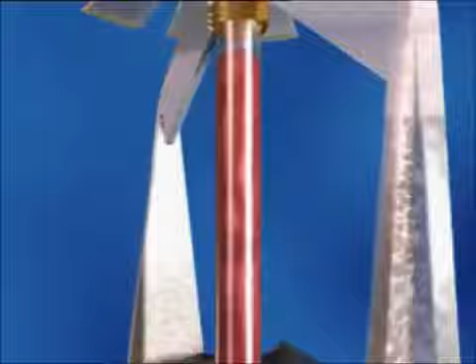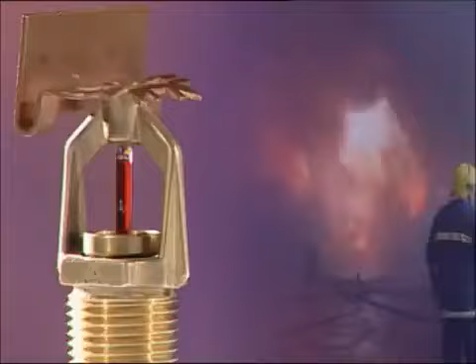Fire sprinkler systems were invented over 120 years ago. Since then, several hundred million sprinkler heads have been installed throughout the world. In that time, they've effectively protected thousands of buildings, helped prevent the financial collapse of numerous businesses, saved countless lives, prevented innumerable burn injuries, and protected the environment from catastrophic fire-related pollution. They're universally acknowledged as the most effective first line of attack against fire.

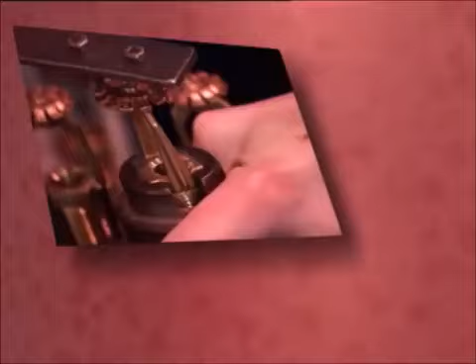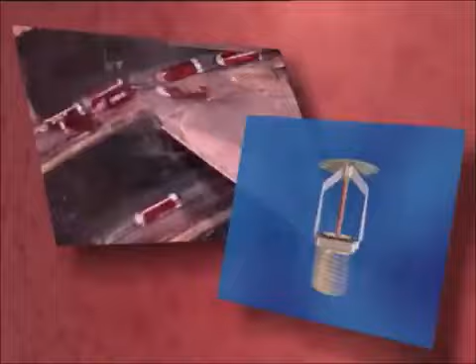The world's first rules for the design and installation of automatic fire sprinklers were written in the UK by John Wormald in 1885. Fire sprinkler systems in the UK are generally designed in accordance with British Standard 5306 Part 2, and in some instances, Loss Prevention Council (LPC) rules for automatic sprinklers. American rules may sometimes be used, being Factory Mutual or National Fire Protection Association.

Sprinklers are designed to cope with the fire risk presented by each individual building and may also be specifically configured to save lives.

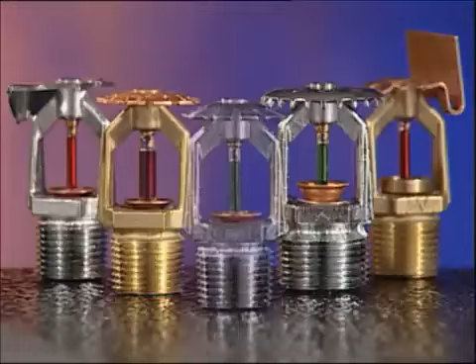Water still remains the most effective firefighting medium available. Sprinklers will deliver water right into the heart of a fire during its early stages through a specially designed sprinkler head.

Sprinkler heads are unique. They automatically detect a fire, discharge water right into the seat of the blaze, and operate a local alarm. They can also operate a remote alarm to alert the fire brigade or other emergency centre.

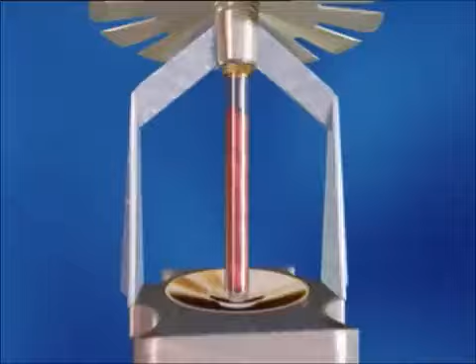A typical sprinkler head comprises a threaded body to connect to pipework, with a valve seal to hold back the water. The valve seal is retained by a glass bulb which contains a liquid that has a high coefficient of expansion. A small measured quantity of vapor remains trapped when the bulb is hermetically sealed.

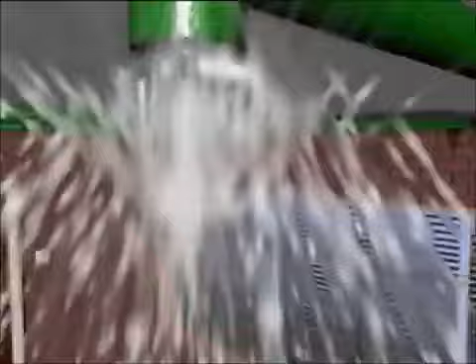When the liquid expands under the influence of heat from a fire, pressure in the bulb rises until the vapor is compressed. Further increases in temperature cause a rapid build-up of pressure sufficient to shatter the bulb, releasing the valve seal and allowing the water to flow onto a water distribution deflector. This results in an even distribution of water droplets in a predetermined pattern over the fire.

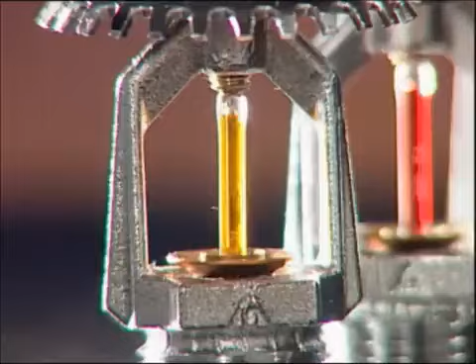Sprinkler heads are available in a variety of operating temperatures, which are identified by the color of the bulb. The specifier has a vast array of sprinkler heads available to him. Each type of head is designed to cope with different fire risks, different operating temperatures, and different operational requirements.

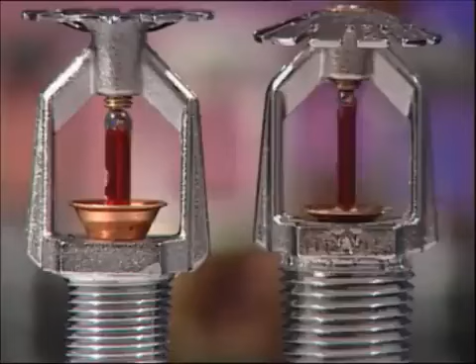The British Standard defines fire risks as light hazard, ordinary hazard, or extra high hazard. Generally, as the hazard increases, so does the water discharge or density discharge.

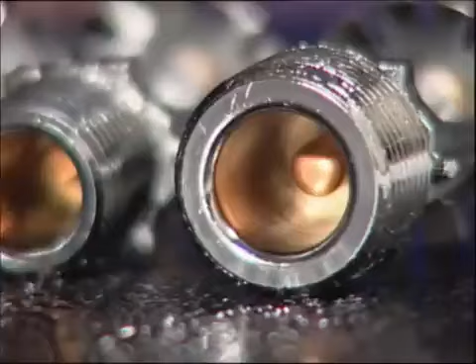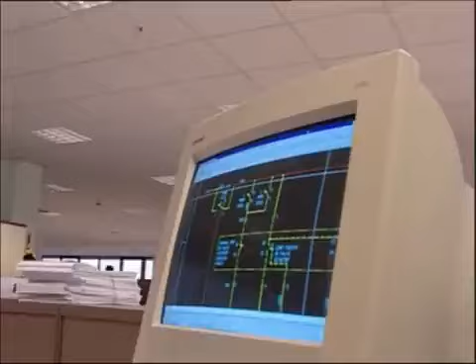Conventional sprinklers can be mounted in either the upright or pendant position, with a deflector designed to spray a proportion of the water discharged onto the surface of the ceiling. Spray sprinklers in upright or pendant positions are used for applications where all the water needs to be discharged downwards.

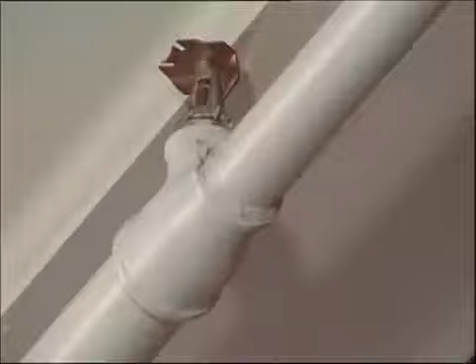Sidewall sprinklers are primarily used to keep ceilings clear of pipework for aesthetic reasons or to avoid having to disturb existing ceilings when installing. Each sprinkler protects up to 17 square meters in light hazard fire risks and 9 square meters in ordinary hazard fire risks.

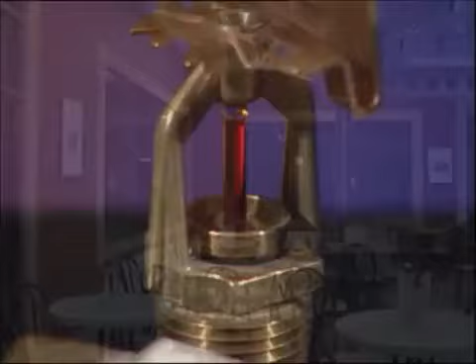Sidewall sprinklers with extended coverage are specifically designed to give an extended coverage of water distribution, with one sprinkler able to protect an area of up to 21 square meters. This type of sprinkler must have a quick response bulb.

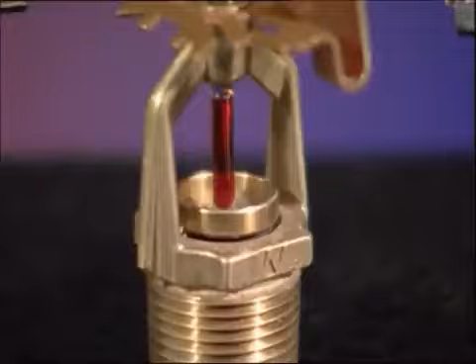In a fire, few deaths result from direct contact with flames. The greatest threat comes from inhalation of the products of combustion, such as carbon monoxide, hydrogen cyanide, hydrogen chloride, other toxic gases, and the associated heat.

The reaction time of quick response sprinklers minimizes the life-threatening levels of toxic gases and temperatures. In many environments, there are people who cannot escape without assistance, such as in hospitals or homes for the elderly. Quick response sprinklers provide valuable time for those in charge to assist their escape.

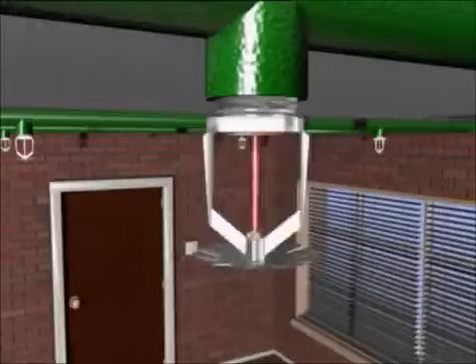A sprinkler head is connected to a water supply via a network of pipes fed throughout the building. The area protected by each sprinkler head can vary from 9 square meters to 21 square meters depending on the fire risk. The pipework is hydraulically designed to ensure the correct flow and pressure of water is maintained at each sprinkler head.

The water supply to the system can be fed from the town main for light to medium fire risks, such as residential, offices, hotels, and light manufacturing and commercial occupancies. For high fire risk areas, such as heavy manufacturing and warehouse storage, a pumped supply from a water storage tank or reservoir is normally necessary.

The design requirements are specified in the British Standard BS 5306 Part 2 and LPC, FM or NFPA design rules. A control and alarm valve automatically delivers the flow of water to the sprinkler heads.

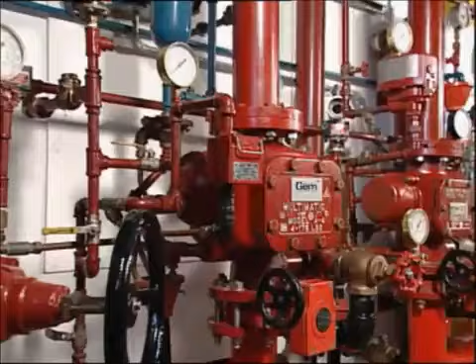There are generally 5 types of sprinkler system that all require different valve arrangements. A wet system is where the pipework is permanently charged with water and used to protect premises where temperatures are unlikely to fall below freezing point.

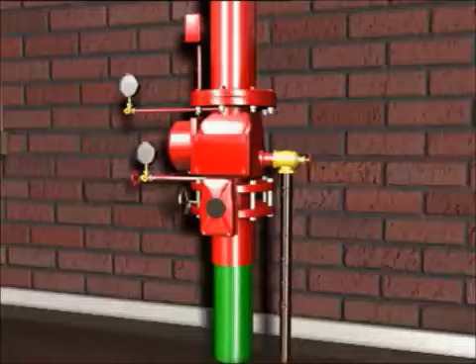Where the ambient temperature may fall or be below freezing point, the presence of static water in the sprinkler pipes is clearly undesirable. In this situation, a dry system can be installed in which the pipework is charged with compressed air. When a sprinkler operates, the compressed air is released and the control valve opens, allowing water to flow into the pipework and discharge from the operated sprinkler heads.

An alternate wet and dry system, as the name implies, allows the system pipework to be alternately charged with water in summer and with air in winter, when there is a risk that the ambient room temperature can fall below freezing.

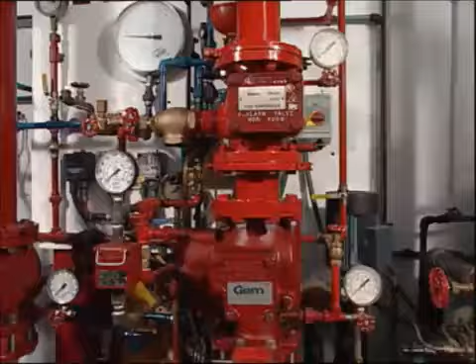Pre-action systems are comprised of a standard sprinkler system and an independent electrical system of heat or smoke detectors installed in the same areas as the sprinklers. On receipt of a signal from 2 or more detectors, the main control panel automatically opens the control valve, allowing water to flow into the sprinkler pipework.

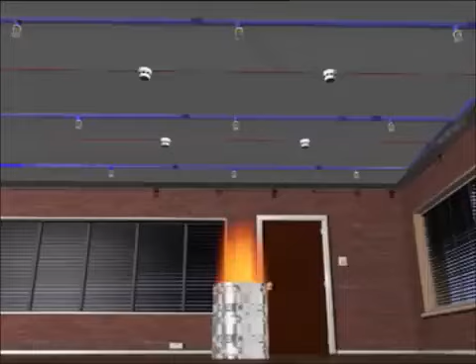Water is only discharged when the individual sprinkler heads reach their operating temperature. Any physical damage to a sprinkler in a non-fire situation will not result in water discharge, but will cause both visual and audible alarms to be raised at the main control panel only.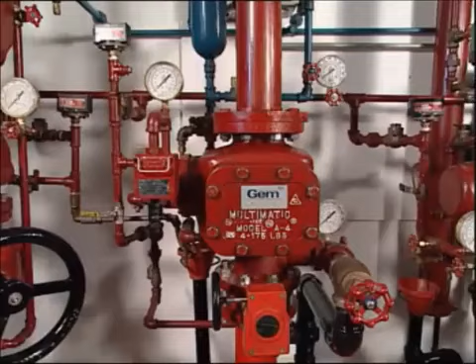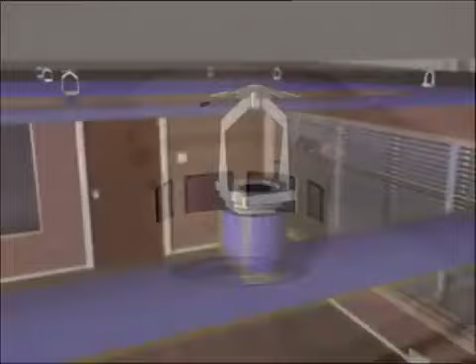A deluge system, unlike any other typical sprinkler system, is designed specifically for high-hazard applications with fast fire growth potential. The deluge valve is actuated by a separate detection system responding to a fire. This brings a large number of open sprinklers into action simultaneously throughout the protected area.

The successful performance of sprinkler systems has been detailed in records from across the world, paying testament to their outstanding reliability and effectiveness. In Australia and New Zealand, where it's a requirement that all fires must be reported, records reveal that over a 100-year period, sprinklers successfully controlled 99.5% of fires in sprinklered premises.

Statistics collated in Europe over the last decade are remarkably similar, showing that in fully sprinklered premises, 99% of all fires have been controlled by the sprinkler system. The reason sprinklers are so effective is because they attack the seat of the fire before it has time to grow and spread. There's no excessive use of water.

In Germany, for example, 86% of fires in sprinklered locations have been controlled by 5 or fewer heads. In the UK, it's reported that of the fires in sprinkler-protected buildings over a 10-year period, almost half were controlled by 1 or 2 sprinkler heads only.

Fire brigades, local government authorities and politicians alike have all seized upon these statistics. This has generated numerous campaigns for sprinklers to be installed in applications that could only ever have been dreamt about when sprinklers were first commercially launched over 120 years ago.

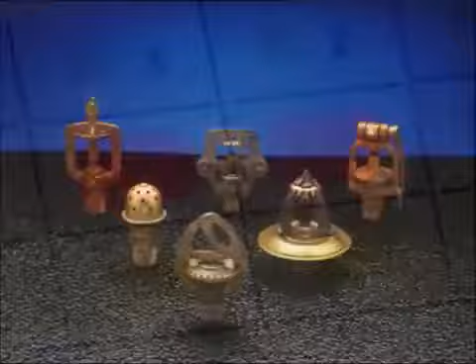That's because sprinklers are unique. They not only detect a fire and raise an alarm, they operate to control it and in many cases extinguish the fire before the arrival of the fire brigade. Only the sprinkler heads closest to the fire operate.

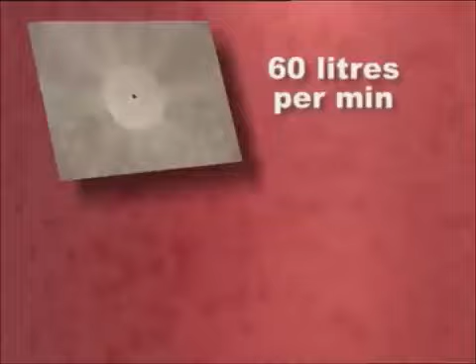Water is discharged by a sprinkler directly onto a fire at a rate of a minimum of 60 litres per minute, in comparison with an unsprinklered building where the fire brigade using only 1 fire hose could discharge 500 litres per minute. The fire will also be much larger as it will have grown for at least 10 minutes before the fire brigade arrive, so the likelihood is that more than one hose would be used.

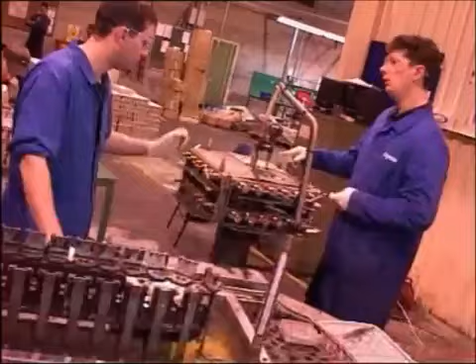Worldwide research shows that of the 40 million sprinklers installed every year, only 2 may operate accidentally. This is because every head is individually tested before leaving the manufacturer.

Sprinklers are economical to install. For example, in the case of office blocks and hotels, the sprinkler system would cost about the same to install as a quality carpet for the equivalent area.

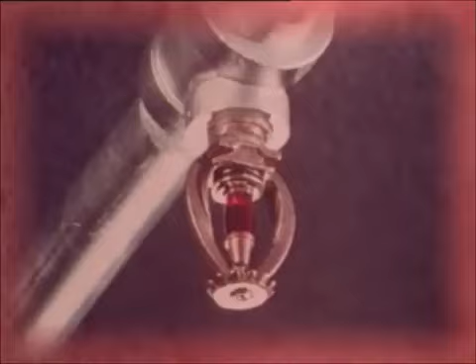Sprinkler systems will have a lifespan of at least 25 years, probably 50 years. Some systems are still in use today that are over 120 years old.

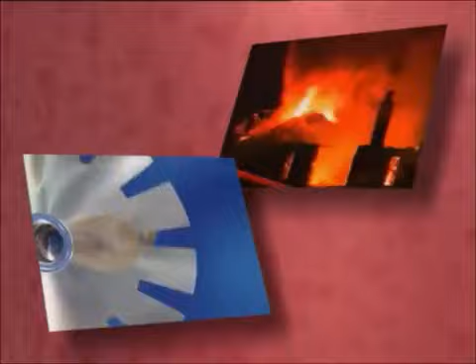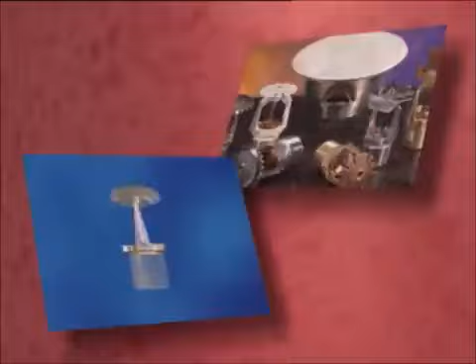The threat from fire will never change. It will always be with us, endangering life, property, and the environment we live in. Fire sprinklers will protect us and future generations. Fire sprinklers. Protection for life.